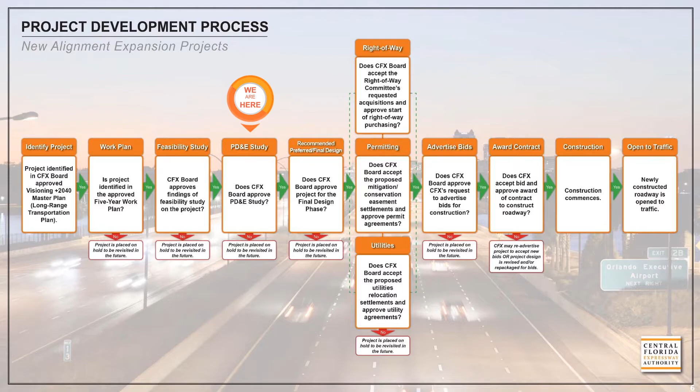A PD&E study has three main components. An engineering component, which consists of the development and analysis of potential design solutions. An environmental component, which evaluates potential impacts to the natural, social, and physical environments. And a public involvement component to inform and involve all interested parties in the development of the proposed transportation project.

The project is located on Maitland Boulevard, or State Road 414, between US 441 and State Road 434. Note that Maitland Boulevard, east of US 441, is a Florida Department of Transportation, or FDOT, roadway and crosses multiple jurisdictions, including Altamonte Springs, Maitland, and Orange and Seminole counties. This project required extensive coordination with FDOT and the multiple municipalities in this area.

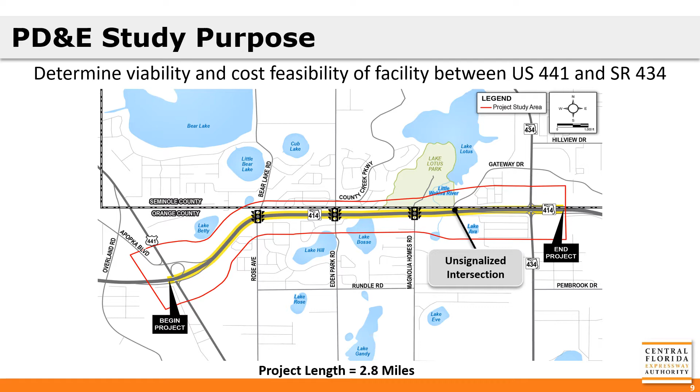The purpose of this PD&E study is to determine if a limited access facility between US 441 and State Road 434 is viable and cost feasible. The project goals include reduced congestion, enhanced mobility options for longer trips, multimodal enhancements, avoidance of right-of-way impacts, and improved vehicle, pedestrian, and bicyclist safety. The project is needed to provide capacity to meet anticipated future traffic demand, improve regional connectivity between northwestern Orange County and the employment centers in the Orlando metropolitan area, enhance safety, and support multimodal opportunities.

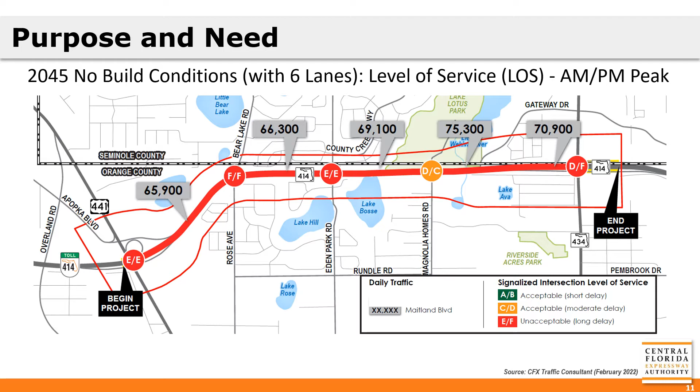A traffic analysis was conducted as part of this study. It indicated that the average annual daily traffic on Maitland Boulevard, west of State Road 434, is expected to increase 25% by 2045. Based on projected traffic volumes, increased delay and congestion is expected along Maitland Boulevard. The no-build alternative considers previously planned improvements and involved widening Maitland Boulevard to 6 lanes. As indicated here, 4 out of 5 intersections along this segment would experience failing conditions in the no-build alternative. The purpose of the State Road 414 Expressway extension is to provide needed capacity on Maitland Boulevard to meet current and future traffic needs. The PD&E study began in March of 2020 and is expected to be complete by mid-2022. Public involvement and interagency coordination have been an integral part of this study.

The existing Maitland Boulevard is a 4-lane divided roadway that's approximately centered within an existing right-of-way of 118 feet minimum. The roadway's typical section consists of 2 11-foot wide lanes in each direction and a 46-foot wide median. Non-continuous sidewalks are present on both sides of the roadway, and designated bike lanes are provided on the existing 4-foot wide shoulders between Bear Lake Road and Gateway Drive.

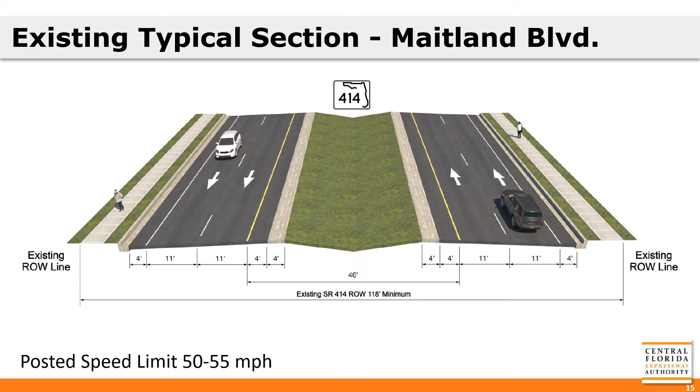The elevated 4-lane expressway extension is to be constructed above the existing roadway with the bridge piers located within the existing median of Maitland Boulevard. The expressway will be elevated above the 4 intersections along the study corridor.

The proposed improvements involve restriping Maitland Boulevard to include 7-foot buffered bike lanes and reducing the design speed to 45 miles per hour. Additionally, the existing 5-foot wide sidewalks will be maintained along both sides of Maitland Boulevard. These enhancements are expected to improve safety for pedestrians and support future multimodal opportunities. No right-of-way impacts are anticipated.

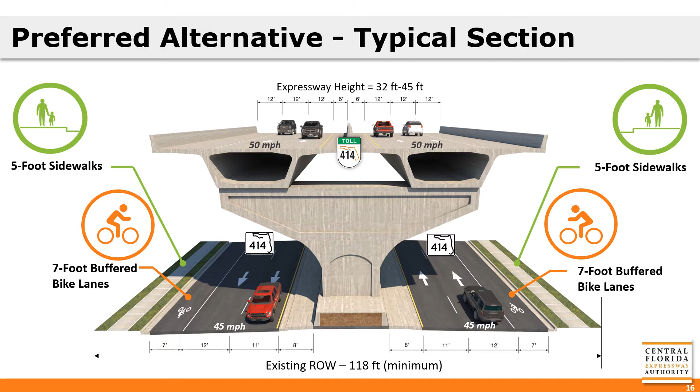Based on agency and public comments received, pedestrian and bicycle enhancements and trail connectivity were evaluated as part of the study. However, as shown on this slide, there are constraints to increasing the existing sidewalk width east of Bear Lake Road and at Lake Bosse Bridge.

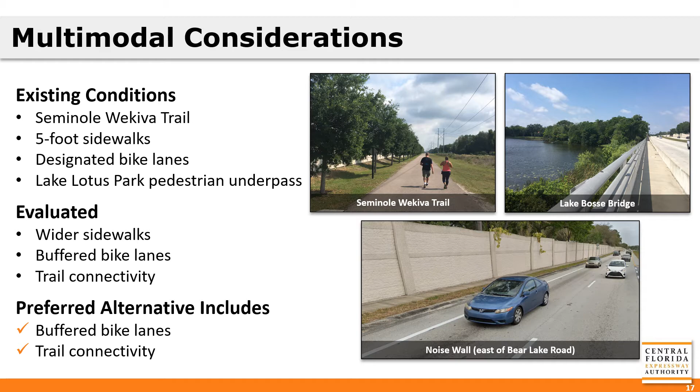The preferred alternative includes buffered bike lanes and maintains trail connectivity with the existing Seminole-Wekiva Trail, as requested by stakeholders. It also accommodates the future Florida Coast to Coast Trail at its future connection with the Seminole-Wekiva Trail at US 441.

Shown here is the overall view of the preferred alternative lane configuration. The preferred alternative would maintain local access to the at-grade Maitland Boulevard cross streets, as well as access to US 441 and State Road 434.

Eastbound motorists traveling on State Road 414 from Hiawassee Road and points west would be able to exit the expressway just past US 441 to access at-grade Maitland Boulevard, or be able to enter the expressway to continue on State Road 414 to areas east of State Road 434.

Westbound motorists traveling on State Road 414 from Maitland Center and I-4 would be able to exit the expressway just past State Road 434 to the at-grade Maitland Boulevard local access lanes, or be able to enter the expressway to continue on State Road 414 to areas west of US 441.

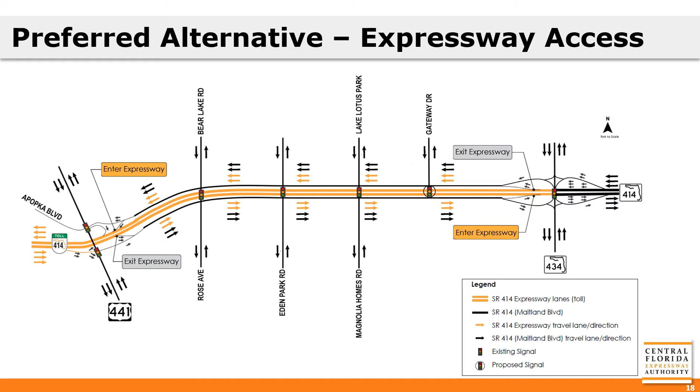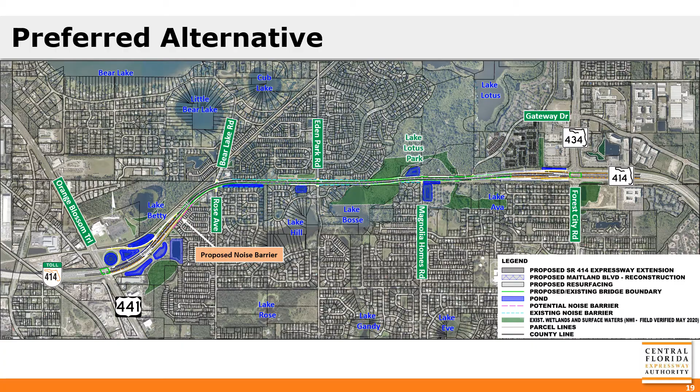An excerpt of the preferred alternative concept plans at the west end of the project at US 441 is shown here. The proposed elevated expressway, shown in dark gray, is on top of the existing at-grade roadway shown in light gray. Eastbound motorists traveling on State Road 414 from Hiawassee Road would be able to exit the elevated expressway to at-grade Maitland Boulevard just east of US 441. Westbound motorists on at-grade Maitland Boulevard would be able to access the elevated expressway at US 441.

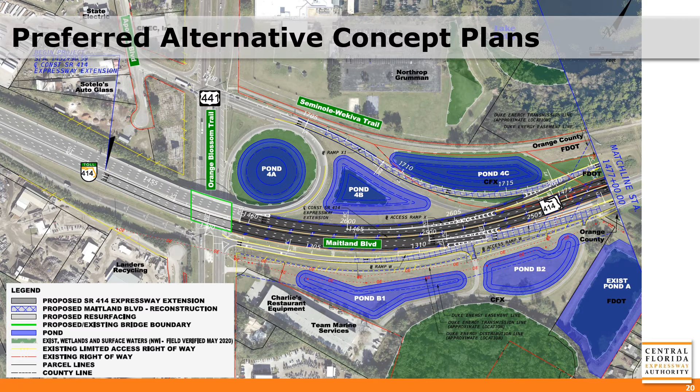An excerpt of the preferred alternative concept plans at the east end of the project at State Road 434 is shown here. Eastbound motorists on at-grade Maitland Boulevard would be able to access the elevated expressway just west of State Road 434. Westbound motorists traveling from I-4 will be able to exit the elevated expressway just west of State Road 434 to access at-grade Maitland Boulevard.

The expressway lanes are designed to carry the traffic passing through this corridor to and from points east and west, which will remove those through trips from the existing at-grade roadway. The expressway lanes are situated largely above the existing roadway, so adding ramps between US 441 and State Road 434 to the expressway lanes is not feasible without acquiring additional right-of-way.

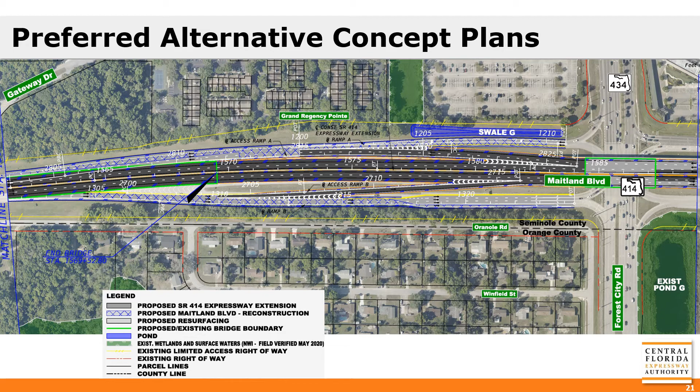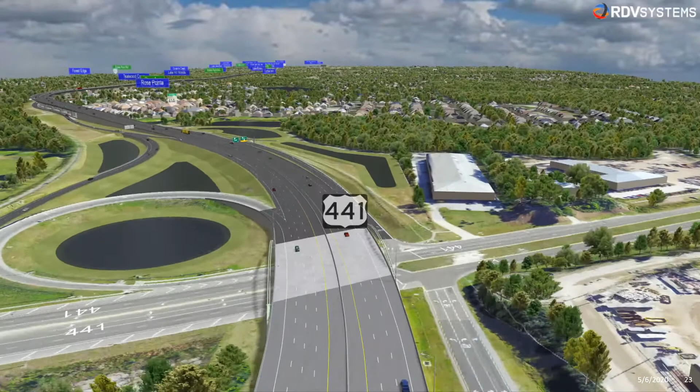We're now going to show you a fly-through of a conceptual view of what this project could look like upon completion. We travel east from the western end of the project at US 441. On the right is an off-ramp, and on the left is the on-ramp to the expressway. To the left, or north, is the Seminole-Wekiva Trail, and to the right, or south, is the Rose Pointe subdivision.

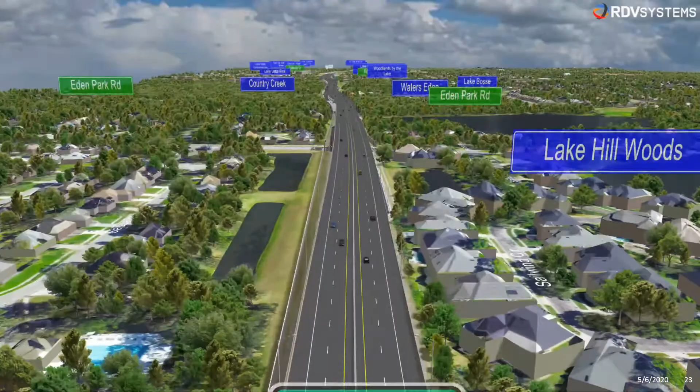Now approaching the Bear Lake Road and Rose Avenue intersection. The Tealwood Cove and Lake Hill Woods neighborhoods are south. Forest Edge is north. Approaching Eden Park Road and the Water's Edge neighborhood, you'll see the bridge over Lake Bosse on the right. Continuing east, Lake Lotus Park is not impacted, and park access is maintained as the expressway spans the Little Wekiva River Canal.

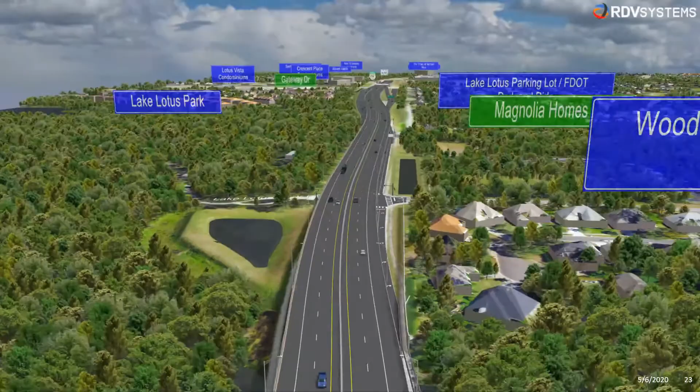Just to the east, there is a new at-grade signal and enhanced pedestrian access at Gateway Drive. Now we approach State Road 434, where an eastbound on-ramp and westbound off-ramp are located. The expressway extension will connect to the existing State Road 414 just east of State Road 434, where the project ends.

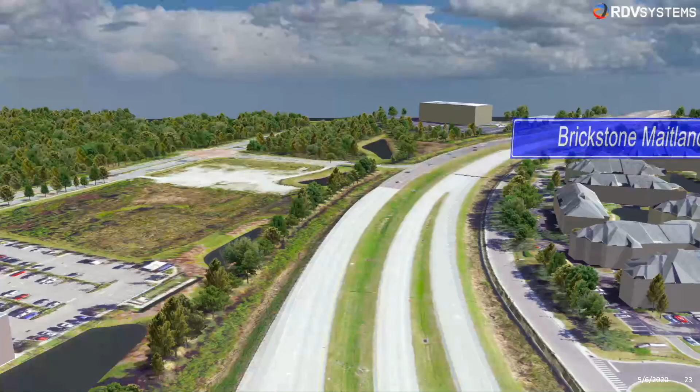The preferred alternative was evaluated in detail to analyze potential effects to the social, cultural, natural, and physical environment in accordance with state and federal regulations. These evaluations are documented in the Project Environmental Impact Report, or PEIR. Because the preferred alternative includes bridging Maitland Boulevard within the existing right-of-way, this project minimizes impact to the environment.

Based on the preferred alternative improvements, it has been determined that there are no impacts to community services, parks and recreational resources, cultural resources, water quality, and air quality. There is, however, the potential for protected species to occur within the study area, but no adverse impacts are expected. The project is anticipated to result in enhanced mobility for all users, improved regional connectivity, and an overall economic benefit.

This project will not involve any right-of-way impacts or cause any relocation of families or businesses. No impacts to residential properties or community resources are expected. The socio-cultural effects evaluation is documented in the Socio-Cultural Effects Technical Memorandum.

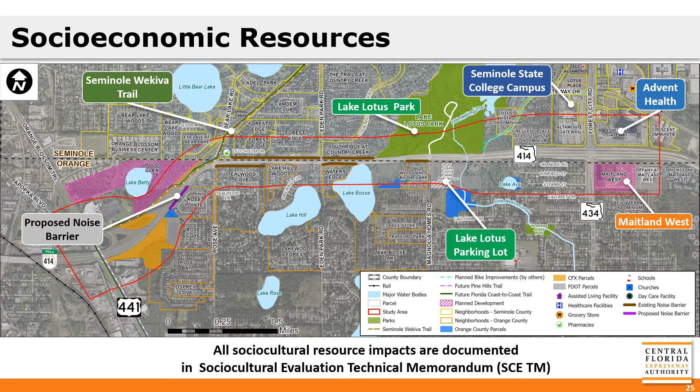The Cultural Resources Assessment Survey Report documents the evaluation of cultural resources. The preferred alternative is not expected to impact any historic or archaeological resources. Because the preferred alternative is to be constructed within the existing right-of-way, Lake Lotus Park will not be impacted by the project. Existing access to Lake Lotus Park from both Maitland Boulevard and the Lake Lotus parking lot will be maintained. Access to the Seminole Wekiva Trail and future Coast to Coast Trail will also be maintained.

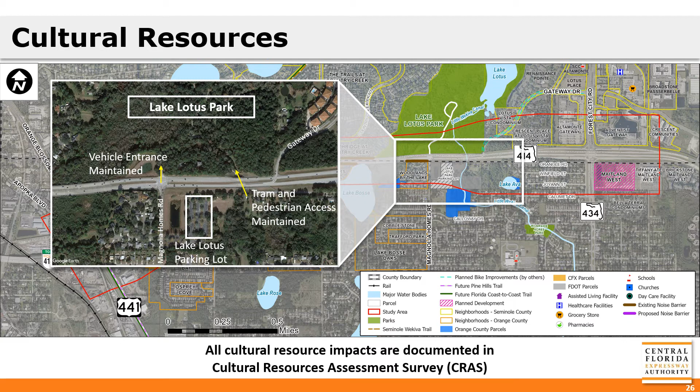The proposed improvements will potentially affect an estimated 1 acre of jurisdictional wetlands and less than a half acre of surface waters. Although unavoidable wetland impacts will occur as a result of the project, the impacted wetlands are located within or adjacent to the existing roadway right-of-way and were previously disturbed by agricultural and residential development, roadway construction, maintenance activities, and the invasion of nuisance and exotic species. CFX will mitigate wetland impacts resulting from this project's construction to meet regulatory requirements.

The proposed project may affect, but is not likely to adversely affect, the existence of the federally listed species, the wood stork. No adverse effect is anticipated to the state-protected gopher tortoise, Florida sandhill crane, southeastern American kestrel, and wading birds, including the little blue heron and roseate spoonbill. CFX is coordinating with U.S. Fish and Wildlife Service and the Florida Fish and Wildlife Conservation Commission regarding potential impacts of these species.

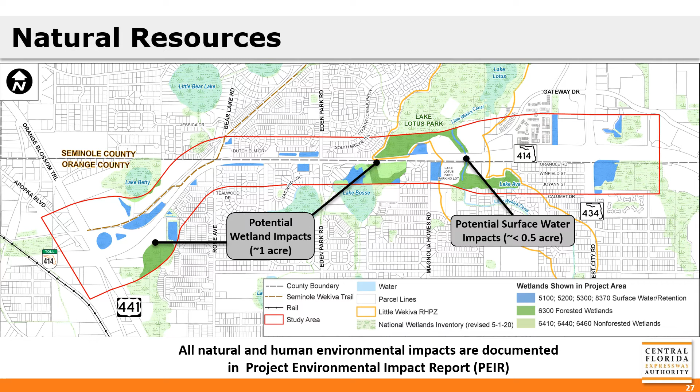Results of the environmental contamination screening showed that 4 sites with a medium contamination risk are potentially impacted. CFX will coordinate on further actions for these sites during the design phase to address potential contamination issues. Before construction, specially trained crews will address contamination in these areas as required.

Results of the utility assessment showed that the A-First pipeline project, which recovers storm water from the I-4 Ultimate project and is treated for use as irrigation in the city of Altamonte Springs, will be impacted. CFX will relocate this pipeline prior to the project's construction. CFX is coordinating with other utility agencies in the area to minimize or avoid impacts.

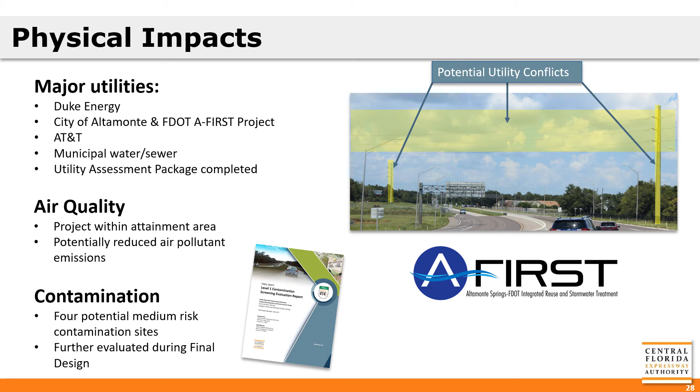This slide presents a summary of potential impacts associated with the preferred alternative. A preliminary cost estimate that includes construction, mitigation, and other design and administrative fees has been prepared for this project. The total cost for implementation of the project is presently estimated at $365 million.

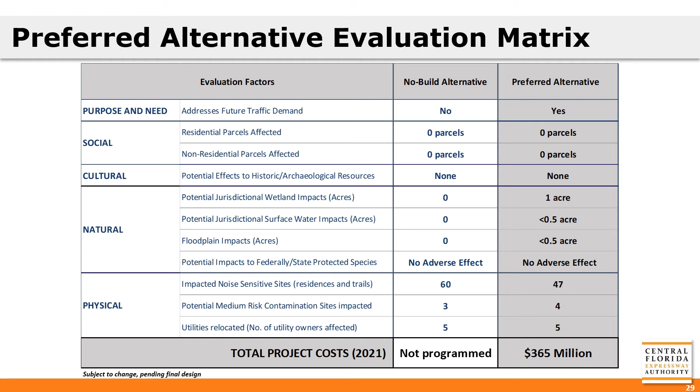The evaluation and analysis from the engineering and environmental studies conducted for this project were documented in a series of reports. These preliminary plans showing the proposed improvements also are available at the in-person public hearing for review and at the locations shown here, including the project webpage. The study website has been updated with study documents. You can navigate to the study website from the CFX homepage, or you can use the shortened web address shown here. All of the materials presented at tonight's public hearing will be posted on the study webpage.

There have been various opportunities for the public to provide input on this project. We welcome your oral or written comments. At the end of this presentation, staff here this evening will distribute speaker cards to those in the audience who have not received one and who would like to make a statement.

A court reporter will record your statement, and a verbatim transcript will be made of all oral proceedings at this hearing. If you do not wish to speak at the microphone, you may present your comments in writing or directly to the court reporter at the comment table in the cafeteria. Every comment method carries equal weight. Written comments received or postmarked by April 11, 2022 will become part of the public record for this hearing.